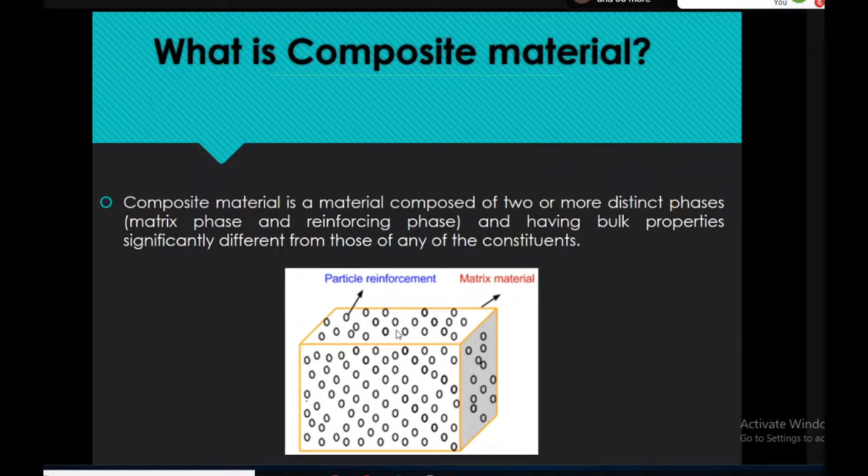Now, where do composites fall in the Young's modulus versus density chart? Whenever we talk about Young's modulus and density, these are the two basic properties of any material we focus upon. So for any analysis or calculation, Young's modulus and Poisson's ratio are very important properties.

Let's say we have conventional materials like metals. For these, we have a standard Young's modulus of elasticity and Poisson's ratio. If I take the example of steel, its Poisson's ratio is around 0.3, and Young's modulus is around 200 GPa, or 200 into 10 raised to power 3 Newton per mm square. But when you try to manufacture a composite material, the properties would be different.

Metals have isotropic properties, meaning there is a homogeneous distribution of the material. But when you talk about composites, the distribution may not be homogeneous. There are certain reasons for this. The first reason is that the phases are different - in the liquid phase of aluminum, it is not possible to distribute silicon carbide uniformly. That is why we don't get isotropic properties, and because of that these properties change. This is why composites fall into orthotropic or anisotropic material categories, and their properties change accordingly.

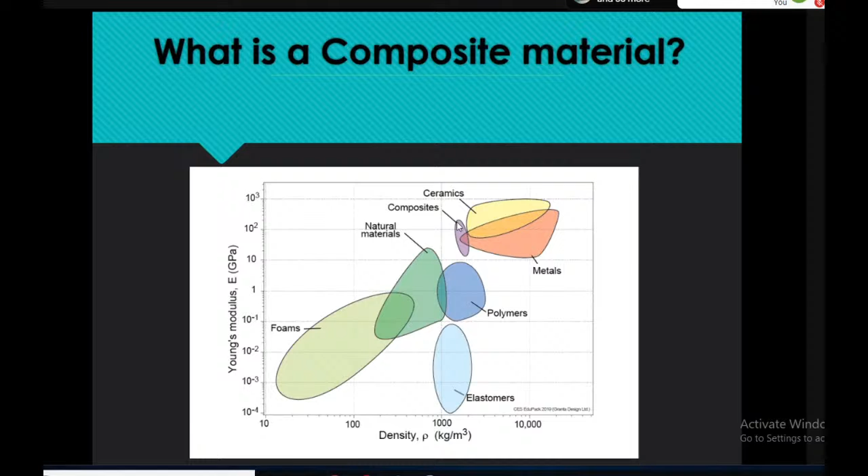Now there are a lot of applications of this material. One important reason is that the strength to weight ratio increases, as we have seen, because the modulus of elasticity increases.

So when you have the requirement of higher strength, but if we talk about an aeroplane - while it is moving away from the center of gravity, the weight should be less. Whatever weighs less can fly easily, or the effort required is less. So people are trying to develop such materials to reduce the overall weight of the aeroplane. If you've heard about the number of satellites we have launched with composite material, they are weighing very, very less right now. So people are trying to develop materials that weigh very, very less.

Now, can anybody tell me what is the density of aluminum?

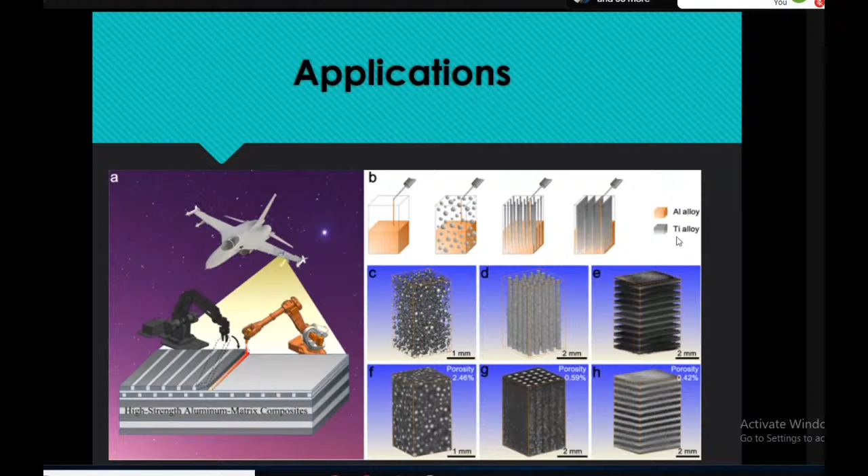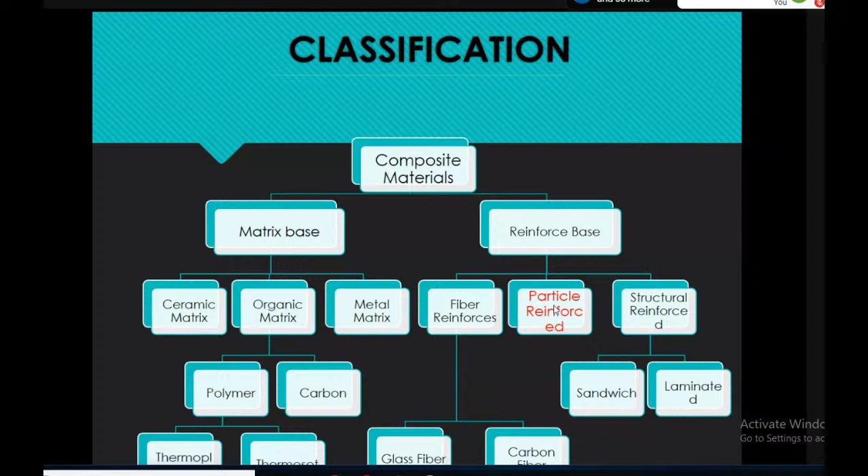Now the techniques of manufacturing: any conventional material, if you take, is available as an ore type, and from ore we do the processing and get the raw material. Then if you perform casting, you get the solid material, which we call billets. But when we talk about composite material, it cannot be manufactured by conventional casting.

Because the material you are trying to add, the particle reinforced, is not going to mix with each other easily. Simply put, if I put ash, fly ash from burnt paper, on top of water and try to mix it, it won't be possible. Whatever you try, it won't easily mix. Rather, what you have to do is increase the density of the material, increase the viscosity of the material, then you can mix it.

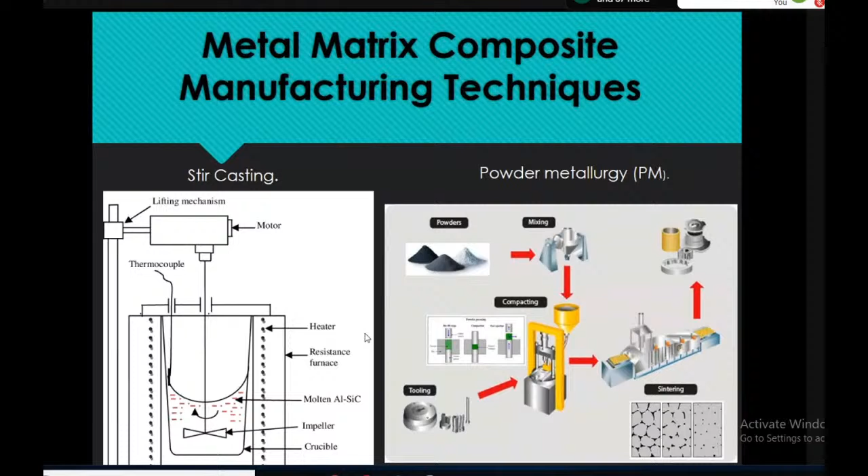Now the powder metallurgy technique, just what we discussed: blending of the powders, then compaction, then hot pressing, and then extrusion. So these are the processes we follow for powder metallurgy.

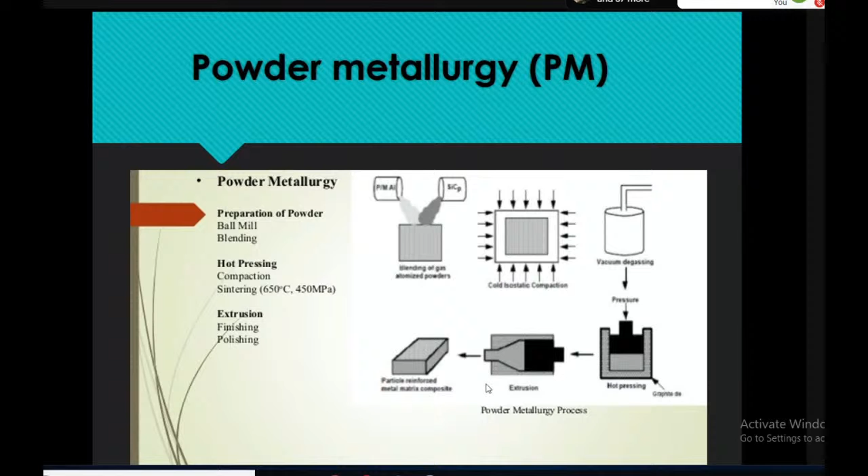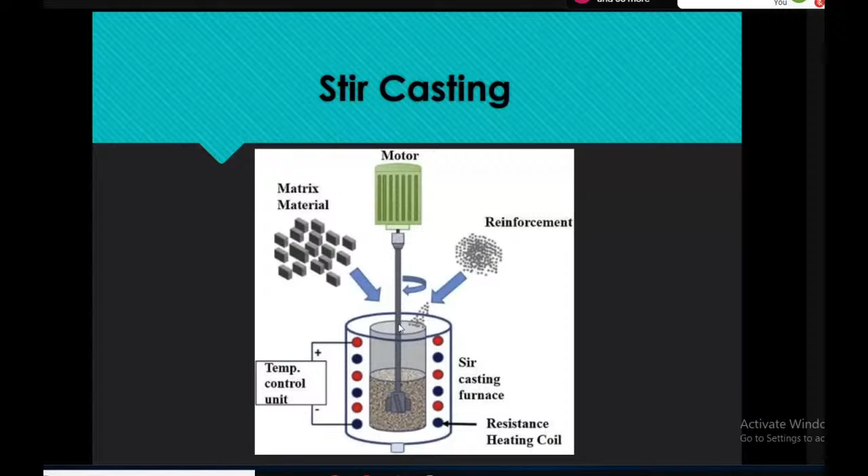Now why are we preparing such kind of material? There is always a reason, that the property should improve. Which property are we targeting particularly? We are targeting the hardness. Let's say for aluminum, the hardness is around 50-55 BHN.

Now it is not like if you add 20% SiC you get the same performance. No, that is not possible. If you add more than 10%, this could drop and the material completely becomes brittle. So that we cannot do. This is again a trial and error you should have, to get better performance. So 112 is the micro hardness we can receive at 7% weight percentage of SiC.

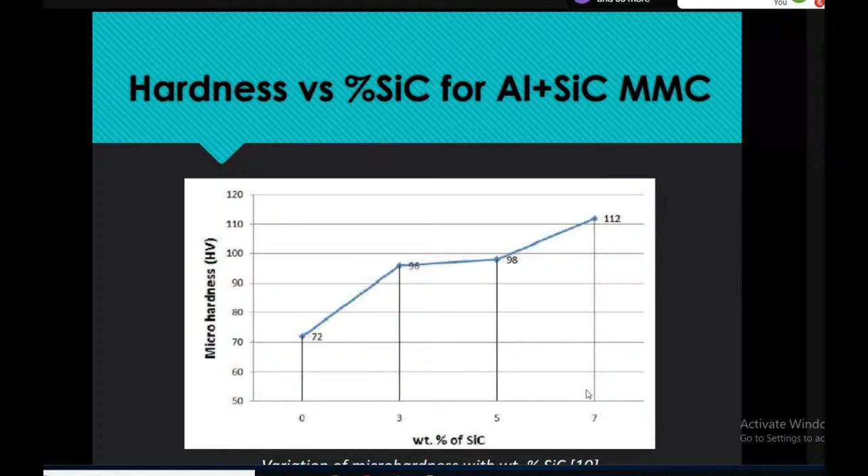Now this is again a question: when you go beyond 10%, what will happen? Definitely the graph is going to drop. The reason being, finally your material becomes hard and brittle, so the ultimate tensile strength would get reduced. You know about the stress strain curve for brittle material and ductile material, so that is the difference, correct? So we cannot make the material brittle, otherwise the applicability of the material would get reduced.

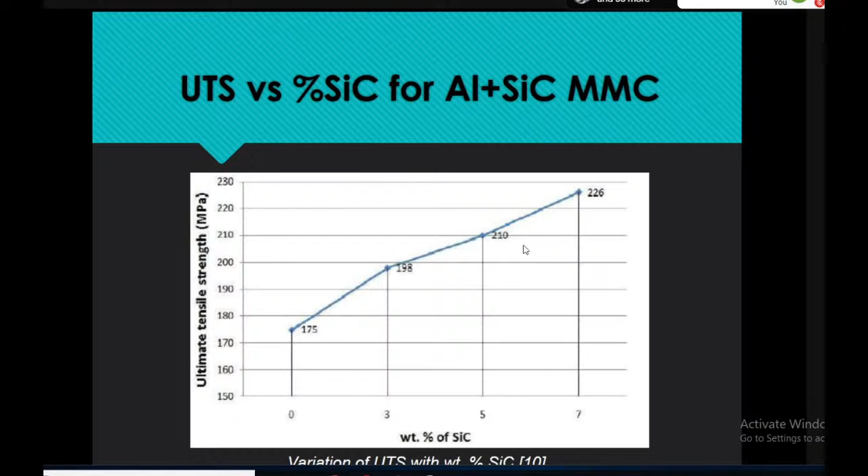But what is our focus? The material should be in the limit of ductility. The modulus of elasticity, or the yield limit, should be proper for the material. So you cannot go beyond that. This kind of behavior we are not expecting, so we should not perform that. Let's say we should not go up to 30% SiC.

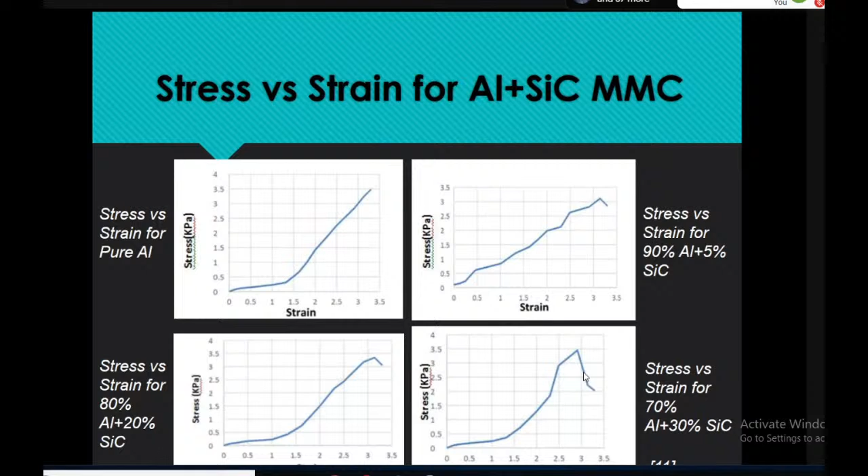So let us discuss some case studies I'm having, what we did till now.

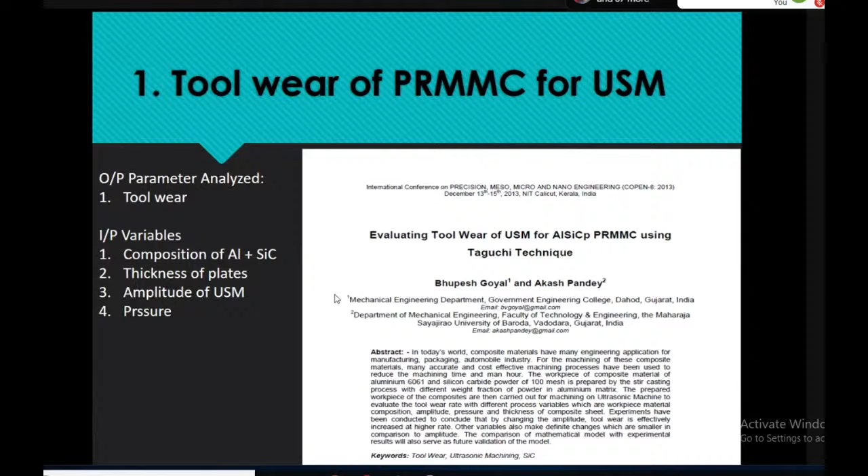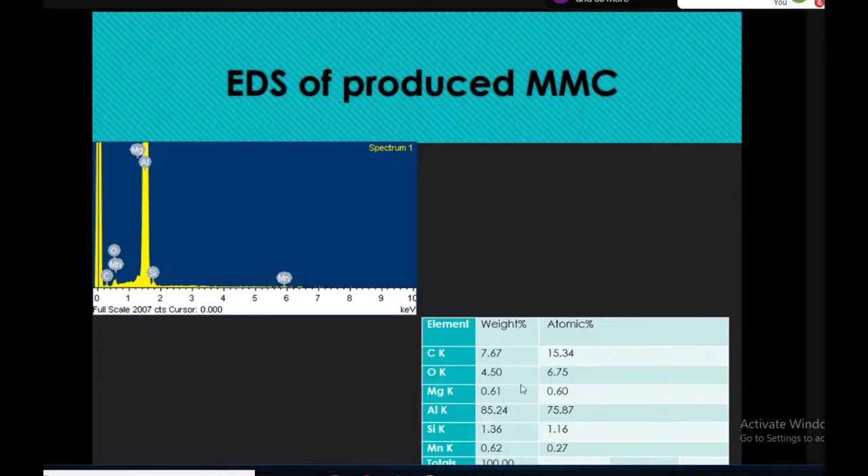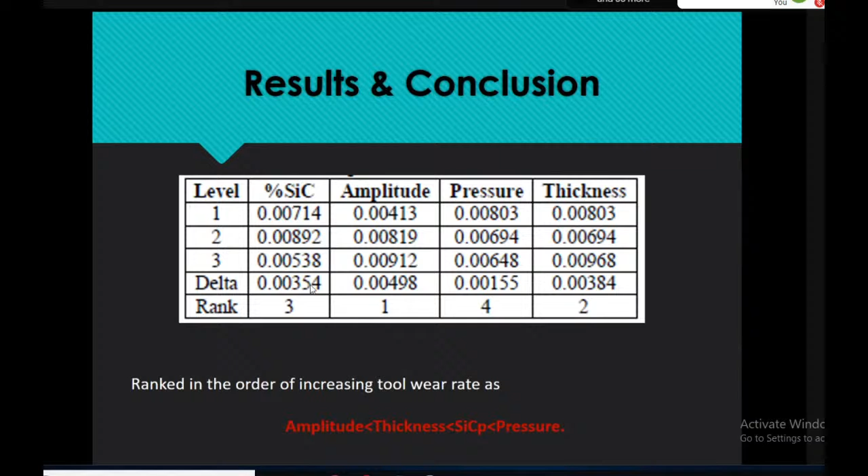Let us move to the second case study.

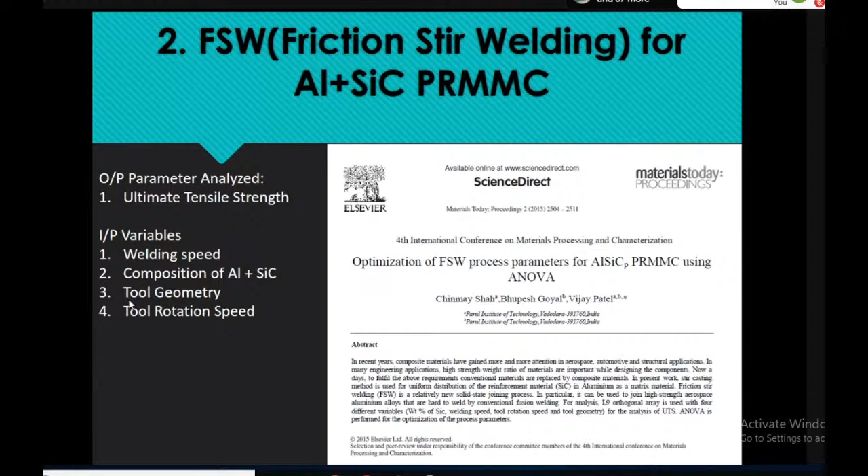With 2 of our faculties, Chinmay Shah and Vijay Patel, we worked on FSW, friction stir welding. We were trying to do optimization of FSW process parameters for aluminum silicon carbide particulate reinforced particle using ANOVA. We were trying to measure the ultimate tensile strength as our output variable, and input variables were welding speed, composition of aluminum and silicon carbide, tool geometry, and tool rotation speed.

This is the setup which is available at PDPU Gandhinagar, and we performed our experiment over there.

Friction stir welding is a new kind of welding where different tools are used. Whatever plates you are trying to join, you put them in contact, then you apply the tool, and the tool moves in a linear direction, welding these two materials. These two materials are aluminum silicon carbide composite, which we manufactured.

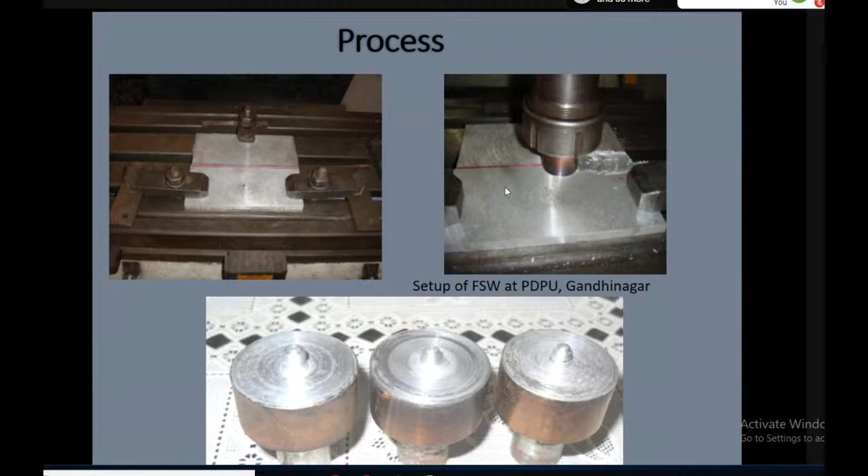These are the variables, C1, C2, C3. This is tool geometry - first one, second is the taper tool we used, third is the threaded tool. So different tools we used, and these are the four variables we had, and we found the UTS, ultimate tensile strength, for 9 components. So we used design of experiment, and the Taguchi technique to find out the ultimate tensile strength.

If you see it properly, UTS of friction stir weld is highly influenced by weight percentage of SiC. When weight percentage of SiC is 20%, then 93.3 is the ultimate tensile strength we receive. While at 10 percentage, it is 35.5. Yes, there are other parameters influencing it, but as the weight percentage of SiC increases, the UTS increases. That is a simple observation we had.

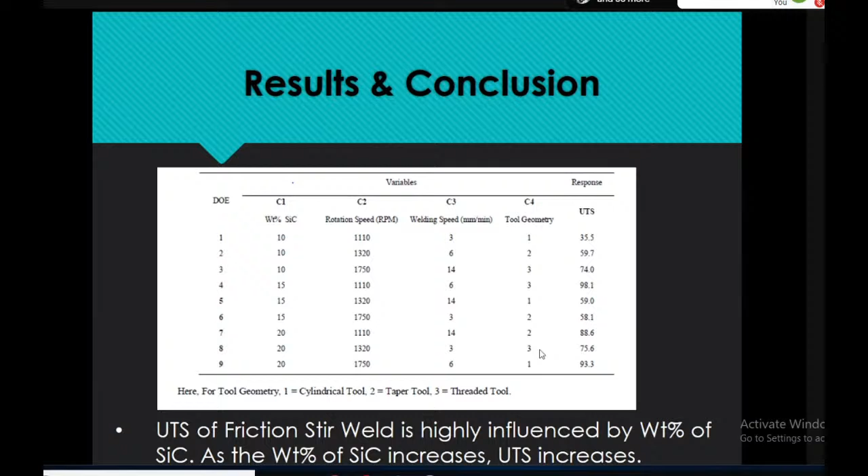So this was the second case study. Now the third one was with aluminum oxide - the particle reinforced material we used was aluminum oxide. This work was optimization of process parameters of CNC milling for aluminum metal matrix composite. Again, my two colleagues were there, Vijay Patel and Chinmay Shah.

The output parameter we analyzed in that performance was surface roughness. And the input variables were the composition of aluminum and silicon carbide, and the speed, feed, and depth of cut. Since we were doing work on CNC machining, these were the standard variables we had to take.

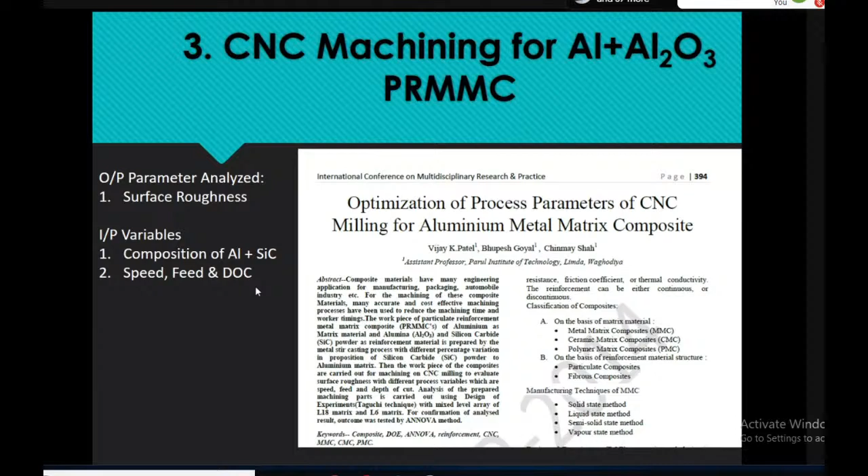Now, what conclusion we made from that particular experiment was that percentage weight of SiC and Al2O3 - these two reinforced particles utilized - influence the hardness of the metal matrix composite. As the weight percentage increases, the hardness increases. But as I said in the graph as well, this is not true as you go beyond 15% or 10%.

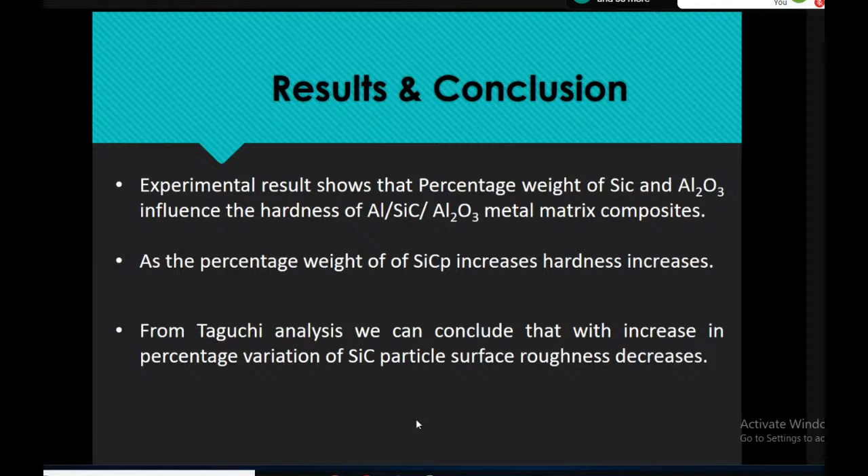This is the setup we still have, and we are still doing some experiments on that. This is the motor available, this is the pit furnace, and the stirrer. You can see at the bottom side we have a bearing because it's a long shaft. When we have a long shaft, you have to provide a bearing so that whatever jerk or vibration you get, it can easily absorb.

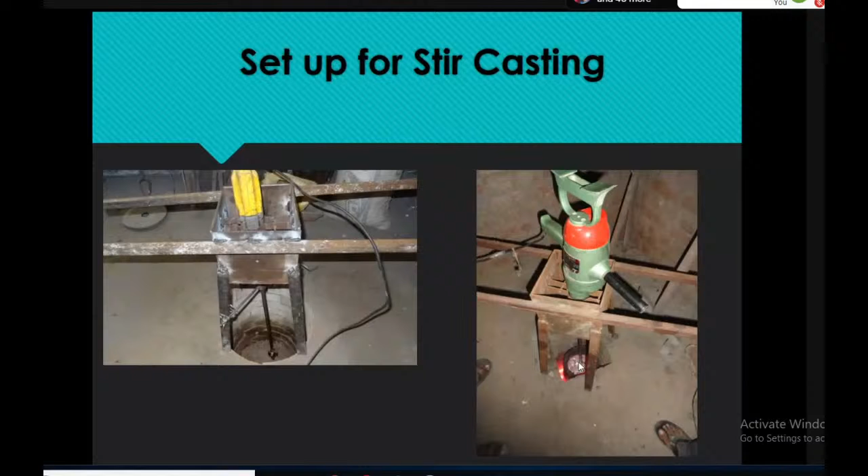During casting, this is the SS304 stirrer that initially we made in 2012, and that was used to manufacture the aluminum silicon carbide particulate reinforced composite. So this was the setup we were having initially.

Now the very important thing I have to discuss is the design of a stirrer. We made a number of different types of stirrers, but just look here. This is the SS304 stirrer, which has a 90 degree angle, simple like a spur gear. And this is the graphite stirrer, which has a 7 degree helix angle.

Now why provide a helix angle? As this rotates in clockwise or anti-clockwise direction, the material at the bottom will try to go up, pushing material upward, while the upper side material goes down. So there is a complete flow of the material, and we get the best results, or homogeneous distribution easily. While in this other case it is not possible.

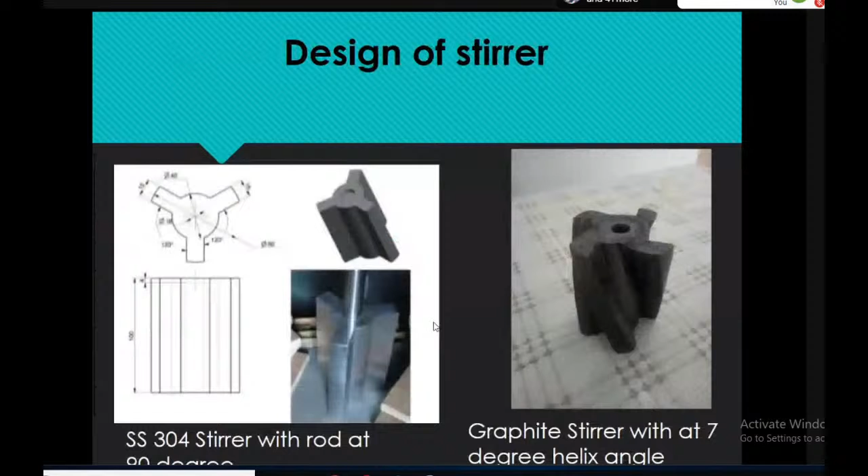अगर आप स्टरर को ज्यादा ऊपर रखेंगे तो वो मेटल को बाहर फेंकेगा, या फिर उसे अच्छे से मिक्स नहीं करेगा। अगर इसे ज्यादा अंदर रखेंगे तो आपको more torque motor चाहिए, क्योंकि it's a dense material, density of 3000 and 2700 kg per meter cube. So for that kind of material, you should have a heavy torque motor, so the requirement बढ़ेगा, and the setup would become sturdy and rigid.

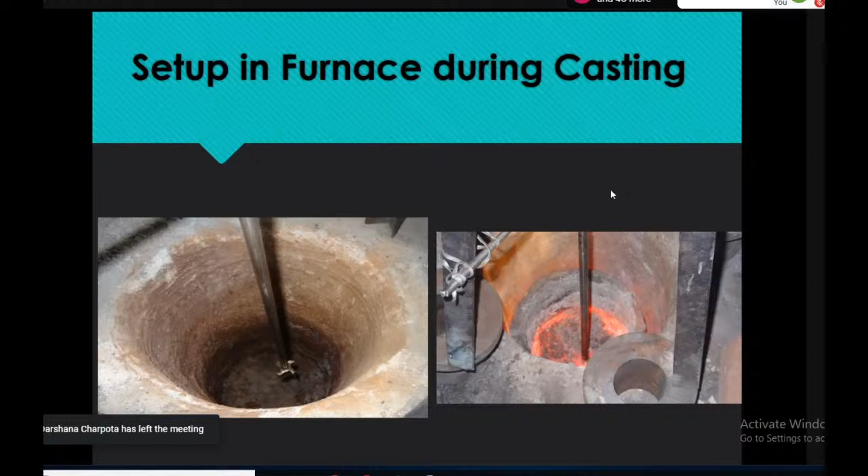So that is why we are trying to have a better position for this stirrer as well, so उसको पूरा अंदर नहीं रखना है। Up to 2/3 depth you should move. And plate size we manufactured was 100 mm by 100 mm by 10 mm.

Now, whatever defects we received, we analyzed them and found that the distribution was heterogeneous। अब कॉपर के साथ एक और डिफिकल्टी है - कॉपर का डेंसिटी बहुत ज्यादा है, it's around 8900 kg per meter cube, और सिलिकॉन कार्बाइड का बहुत कम है। तो अगर आप उसे मिक्स करना चाहो तो definitely you would be facing difficulty when you are having a large density difference, जैसे मैंने पानी और फ्लाई एश का बात किया। तो this is the first reason - heterogeneous distribution because of the density difference.

Second, what we found was that the stirring speed was less - ये थोड़ा हमें कम लगा कि ये नहीं हो रहा है अच्छे से मिक्स। Even if you see physically you would find that ये सही नहीं हो रहा है। And third reason was about less stirring time, and finally the improper solidification. So you can say we did not receive a proper directional solidification. So that was the issue with this particular object.

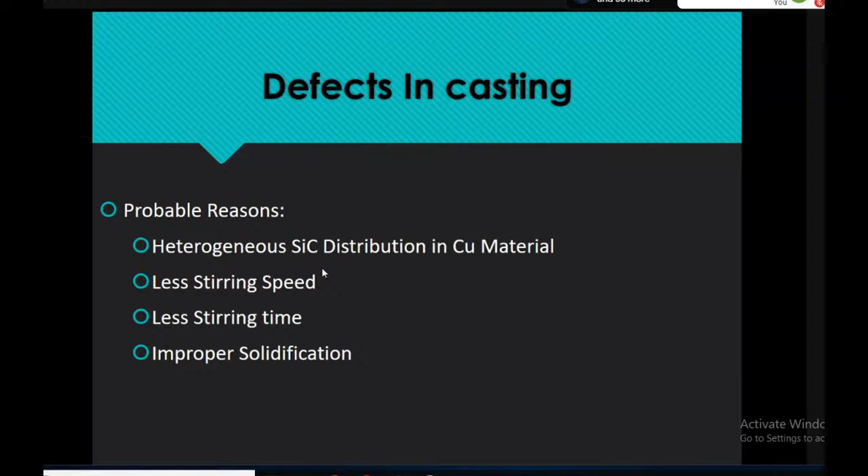अगर आप एल्यूमिनियम लेंगे so 3 to 4 minutes are more than enough, और आरपीएम भी जो हमने पिछली बार यूज किया था, that is enough। You cannot say whether you are performing with aluminum or copper, and keeping the stirring time and stirring speed same - no, it is not like that। If you want this directional solidification and proper homogeneous casting, then in aluminum you can reduce the stirring time.

और एल्यूमिनियम का एडवांटेज क्या है? एल्यूमिनियम के साथ सिलिकॉन कार्बाइड अगर आप डालते हो तो सिलिकॉन कार्बाइड का डेंसिटी is around 3000 kg per meter cube, एल्यूमिनियम का है 2.7, यानी 2700 kg per meter cube। So density difference बहुत कम है, and that is the reason behind the development of aluminum silicon carbide metal matrix composite। ये सबसे ज्यादा यूटिलाइज अभी यही हो रहा है।

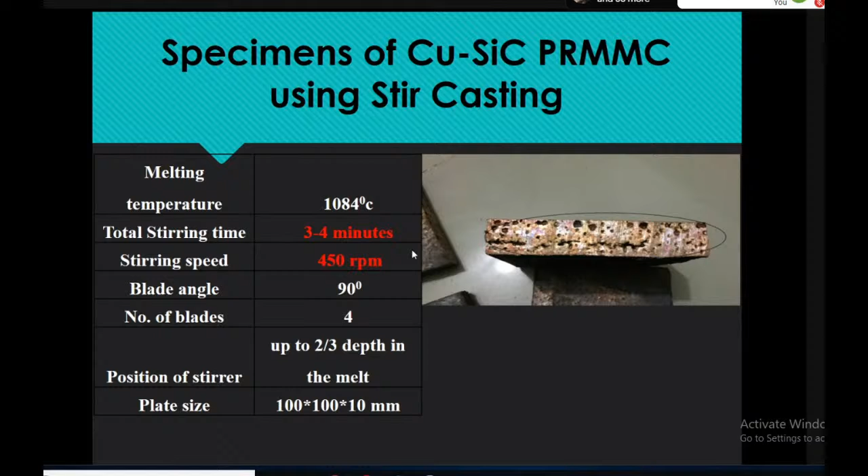So these are the large conclusions from whatever case study we performed - the effect of changing the constituents of particulate reinforcement is affecting the strength of material. We have already seen that from certain graphs. And silicon carbide basically increases the strength of aluminum, but the surface becomes poor.

Now if you want to correct the surface, you have to do machining and perform grinding, which is the costliest process you can say. And if you go with high surface finish processes like honing, lapping, it becomes even costlier. So what happens is as soon as you make the surface rough, you are getting better strength, but your cost of machining would increase a lot.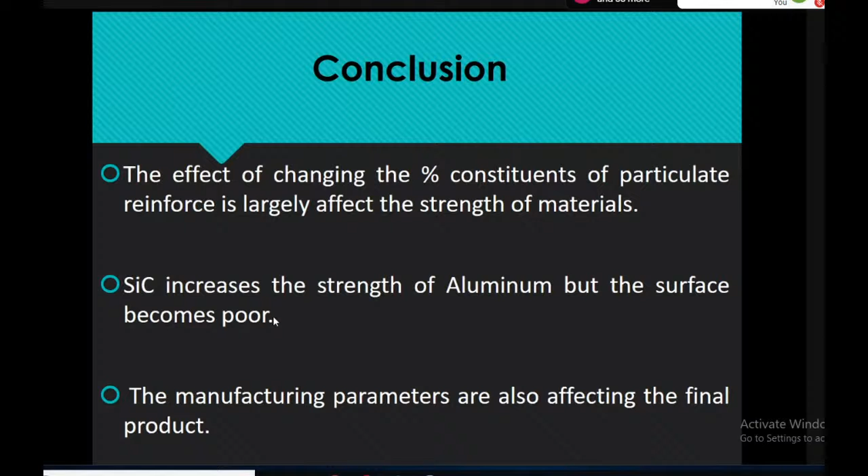Now the last one is the manufacturing parameters are also affecting the final product, as I said. So certain things I have discussed - the manufacturing parameters like what kind of mold you have prepared, whether you are doing metal casting, sand casting, shell molding - that is also affecting it. Those properties also matter. If the refractoriness is not proper for the sand you have used, then it will give you pores. If refractoriness is not correct, if you have not made the mold properly, that is also affecting it. So those parameters are also in the picture once you try to manufacture it.

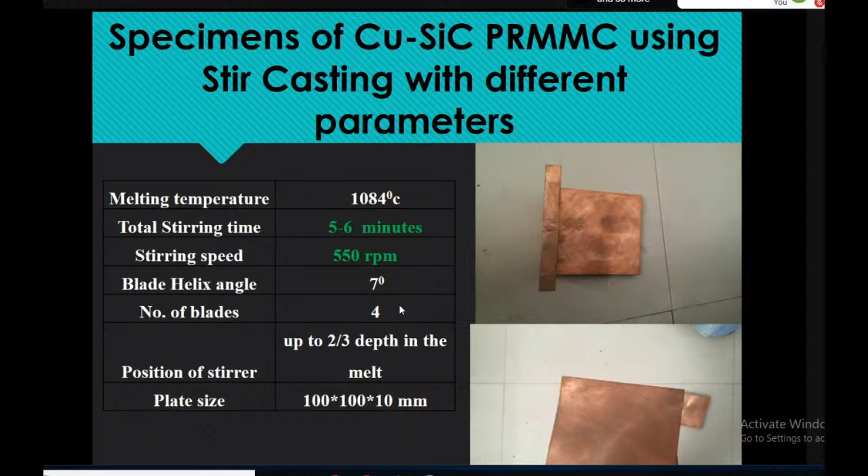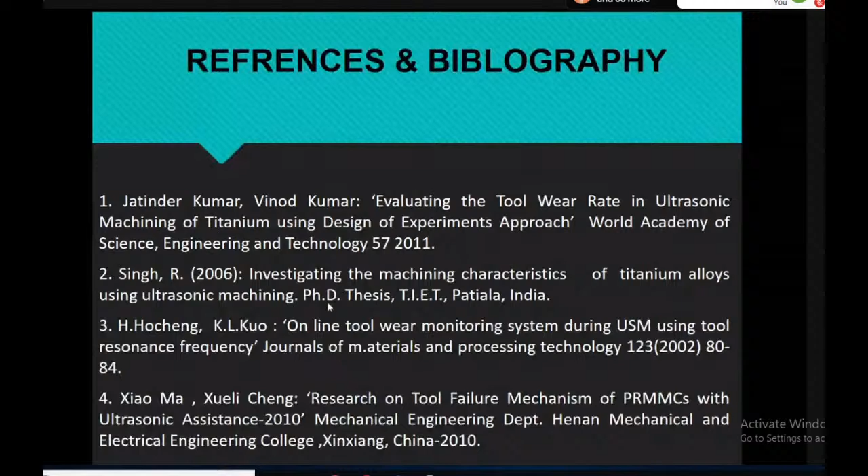Now there's one video that I want to show. Please allow me - these are the few references I've received, and later on we will take the questions. Just allow me to share the video first.

I hope my video is visible. Yes, sir, okay.

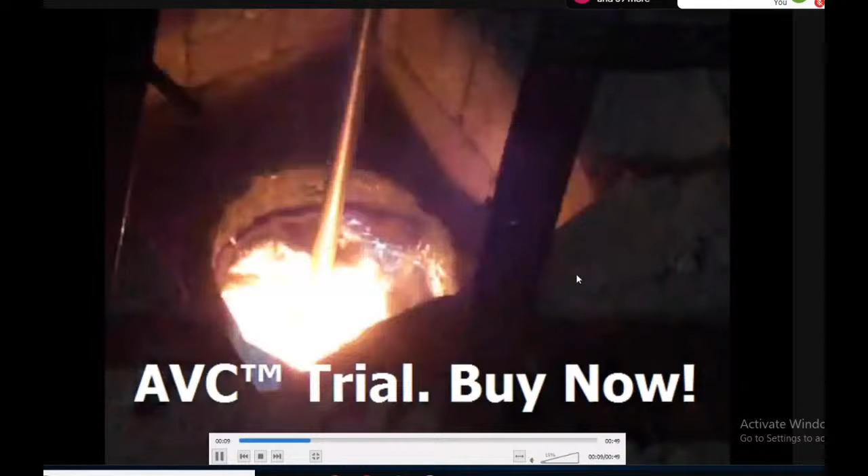See, that's how we started, and as you start the stirring, there's a fire, and it cools as well - it does both jobs. This is of aluminum and silicon carbide.

Okay, so that is all from my end. If anyone is having any query, please you can ask. If you have any question regarding this presentation about the metal matrix composite, you can unmute yourself and ask question if you have doubt or if you want to learn something.

I think, sir, there is no question.